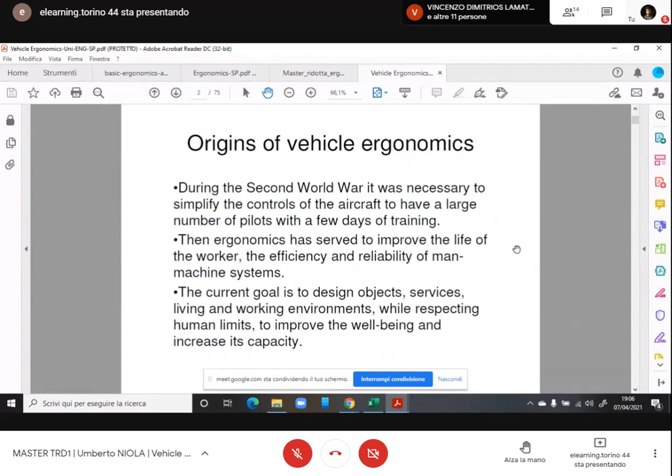There was an increased need for airplanes and expensive, long training for pilots in the world wars, limiting the need for new pilots to be trained, because vehicles are always different, and accidents also occurred due to poor organization of the cockpits. So a great improvement in the study and application of ergonomics was developed for airplanes in the Second World War, and after this also on other vehicles.

We also had our first distinction, in case you didn't hear this first part of the introduction. We have three main families of ergonomics: physical, cognitive, and organizational ergonomics. I'll go briefly into the definitions.

Physical ergonomics is linked to the biometric dimensions and organization of the human body, the internal organs, the manner they work, and the extension and capability of your joints to move. So you can identify the workplace, the organization of controls, access, seating, and all the arguments linked to the dimensions and main features of the human body.

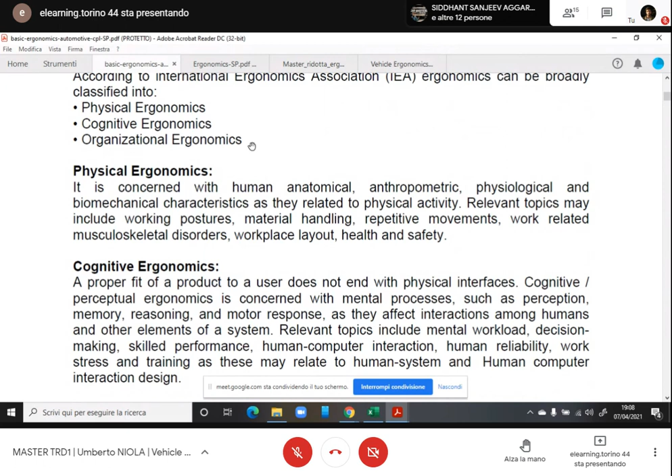Cognitive ergonomics is the manner in which the mind uses the environment. The interface between human and machine is important physically, but you also need communication between them, so you can understand the external world, make decisions, and apply decisions to the external world. You must use your senses - eyes, hearing, touch, smell - if something is cold or warm, for recognition of signals, other people moving, and everything needed for guidance in traffic. This is an application of cognitive ergonomics.

Finally, organizational ergonomics is the manner in which you can manage more than one person. So imagine studying an urban context, or a workplace for teamwork, cooperative work, realizing optimization for the contemporary use of the environment by several people.

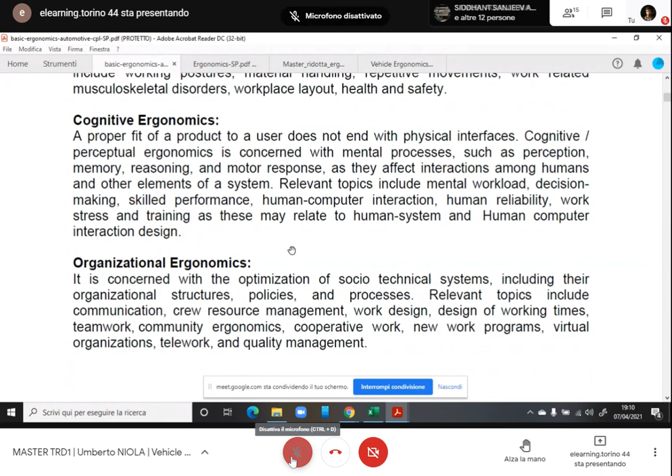Okay, I lost you again. Yes. Okay. No. It's good now. Okay. Yes, I fear I don't see you on camera now. So maybe I lost the communication again. But okay, first of all, we'll tell you if we've lost you. Pardon me, it's not in my power to correct the internet applications.

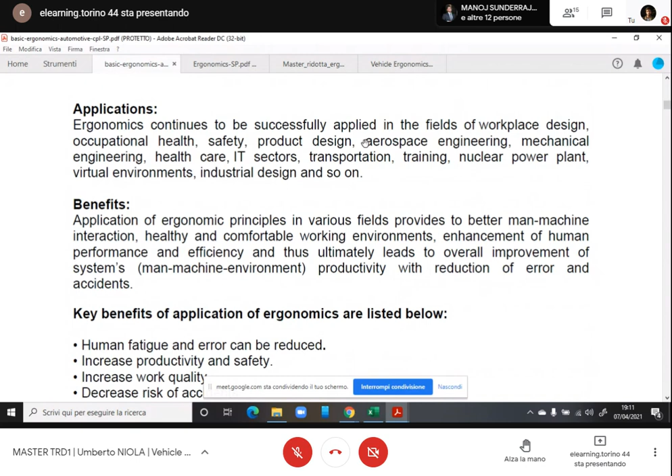So for the applications, you can have a list of them - the benefits in workplace design, occupational health, safety, product design, and other things. But the key benefits are the reduction of human fatigue and error, which can increase productivity and safety.

These terms are not strictly related to economic application - productivity can also mean performance. If you are racing a car, you can go faster with better ergonomics in your car. This is evident with motorcycle riders in racing - they are so linked to their position when riding that the adjustment of the handlebars, the seat, and the shape of the petrol tank is important for driving.

So this is not limited to producing more money - there's also less absenteeism. If you are tired or sick from fatigue at work, you cannot be present at work. Organizational ergonomics applied can reduce lost time, etc.

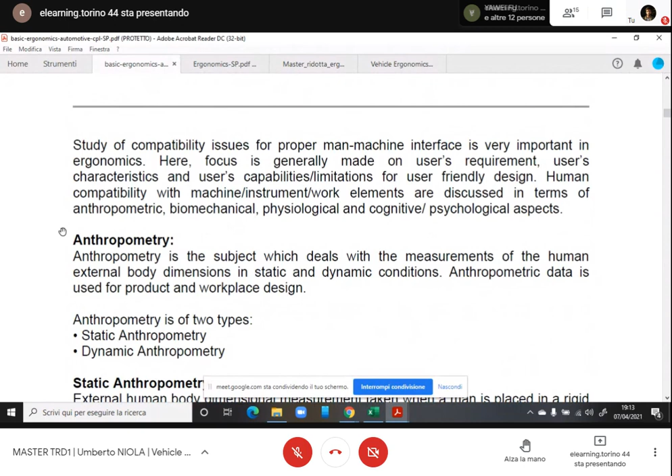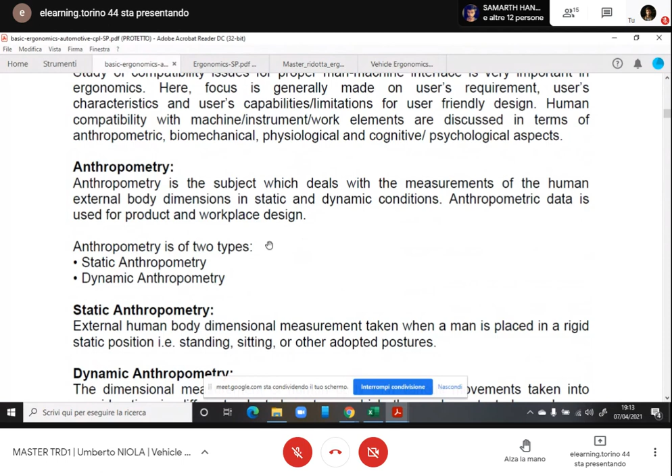Okay, the first part, physical, is linked to anthropometrics. You know what we mean by anthropometry - simply the measure of the human external body dimensions in static and dynamic conditions. Static means the measure of every single part between the joints: the thigh, the leg, the ankle, the feet dimensions, the trunk, head, and all other dimensions in different positions, such as standing, sitting, or other postures.

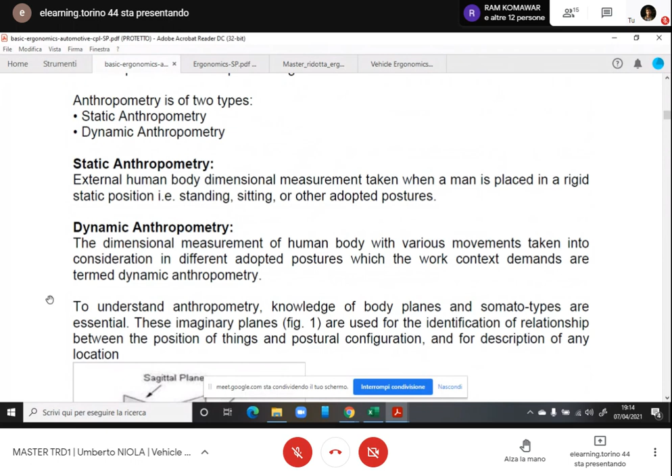Dynamic anthropometry links together the extension and possible positions of the single segments of the human body, so you can reach controls or have access for entering and exiting a vehicle, and also the effort and forces you can apply in different positions, so you can correctly identify and design a lever on the steering wheel, or any kind of object you need to reach and move, like a pedal.

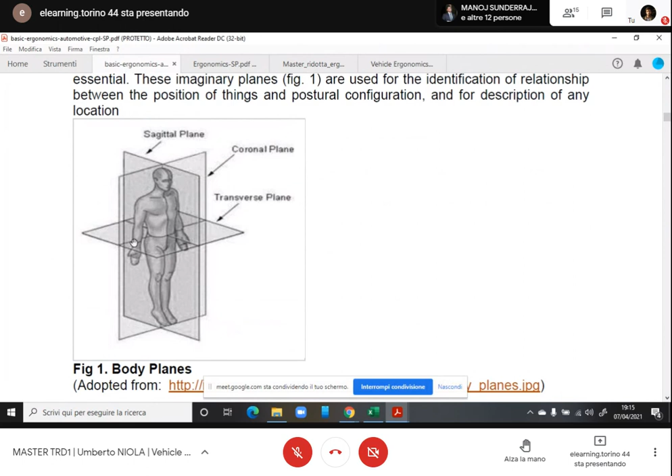So this is the standard reference position for a human body to be considered in the anthropometric study. The sagittal plane divides into half, left and right, symmetrical parts of the human body. Coronal divides the front and rear part of the body. Transverse divides more or less at the belly, the upper and lower part. So this is the reference plane definition.

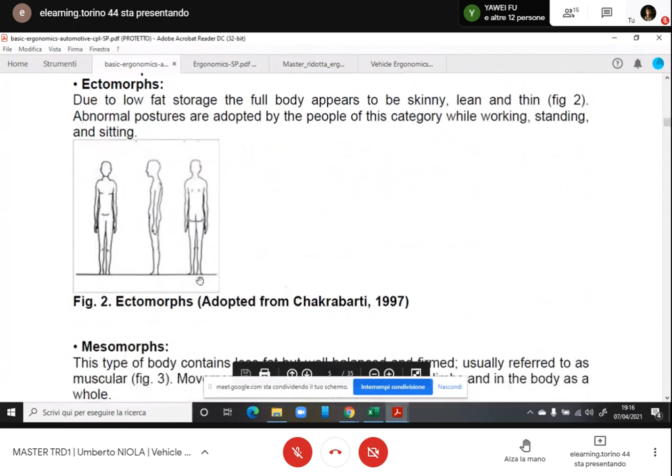We can consider a lot of different approaches to the human body. We can also divide anthropometrics into somatotypes: ectomorphs, mesomorphs, and endomorphs. Simply, we can consider this kind of slim, very slim figure as ectomorphs. The so-named mesomorphs are the normal body, well balanced, firmed, but not fat, or short legs in this manner.

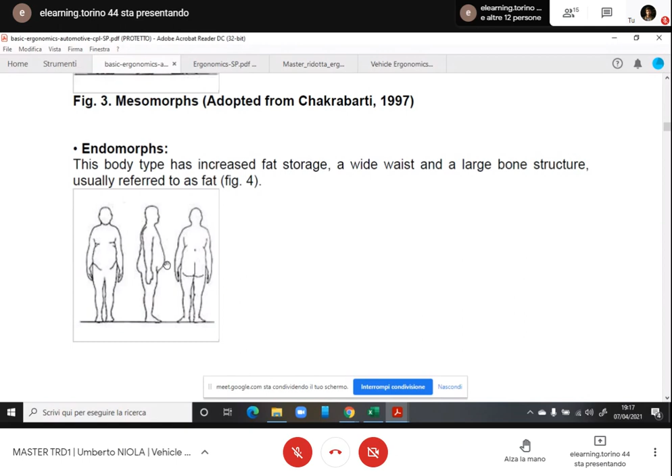The endomorphs are usually associated with fat people. Very different approach - imagine the main composition of a population is in this family, the endomorphs, or the opposite, ectomorphs. This makes a different design for seats, dimension for the seat belts, or distance between the steering wheel and the rider, because the size of the abdomen is very different from one to the other, and also the extension in width.

So we have a lot of different dimensions, and they are also different depending on the geographic area, the age, if you are male or female. So you have different databases for North American people, South American people, Asiatic, European, and African populations, and a lot of different statistics for this.

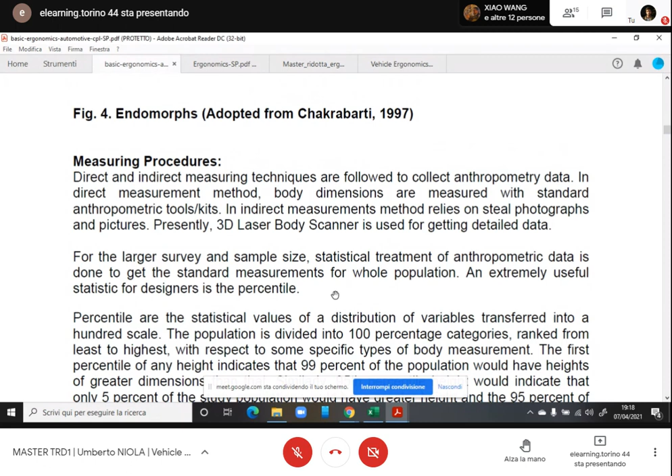When you have enough samples for statistic and anthropometric data, you can also identify the percentile. Do you have an idea of the percentile? Yes, it's the size. I don't remember the number exactly. Anyway, this is a statistical definition, but easy to identify.

Imagine the total number of people you can measure makes 100%. If you take the 100th percentile, this means all the possible dimensions are included in this number. If you take the 95th percentile, which is usually the limit, because very few people are in the extreme condition - very, very small or very, very great, tall or large or other extreme dimensions - you use 95th percentile, meaning all the possible dimensions are included in this list, and all others are greater. So 95 is the top limit for the dimension.

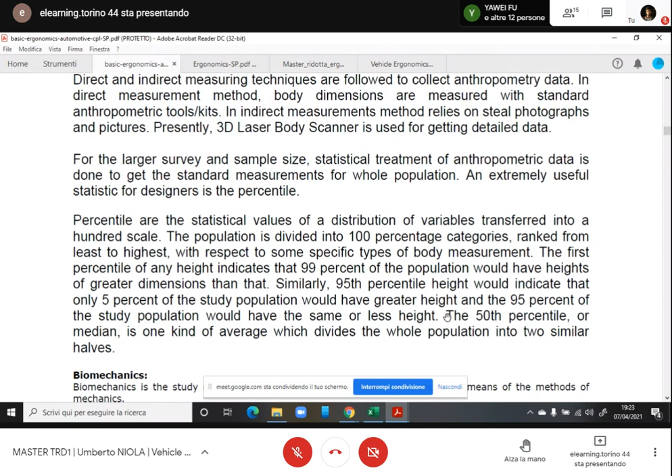Biomechanics includes knowledge of the basic biological features of the human being - the different application of force. This is a sample for applying a load to our arms, and this is different, the capability to lift or make force depending on the position of your arm, but also from your backbone and legs. This is all linked, so you have a lot of samples and different measures made.

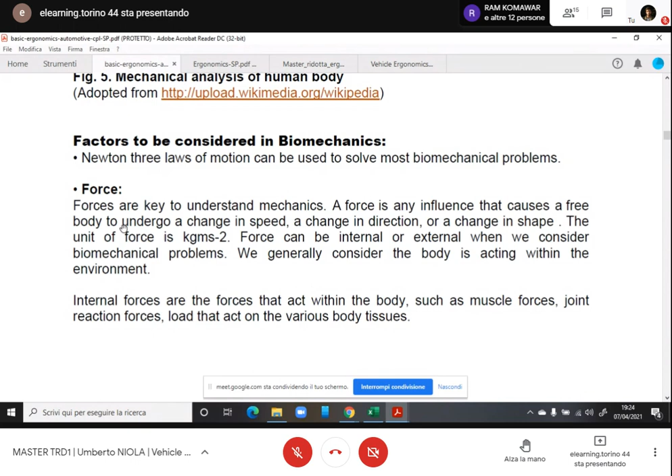So the forces are usually listed in tables, reference tables, to give a reference value if you are designing pedals, levers, wheels like the steering wheel, and something like this. Imagine you must also consider the speed of use of a control, if you have a slow application of force. So force is one main input value or factor considered in biomechanics.

Joints are important because you need to know the comfortable range of motion for each kind of joint, and also the force you can use in a joint depending on its position. So knowledge of the organization is important.

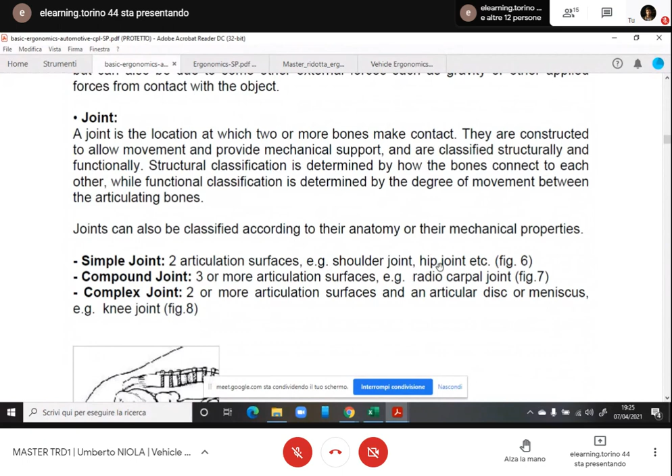You have simple joint, compound joint, and complex joint. Samples here: simple joint is shoulder, hip joint, a kind of ball joint, similar for the shoulder. A complex joint here, compound joint, is the radiocarpal joint, organized by several surfaces and movable parts.

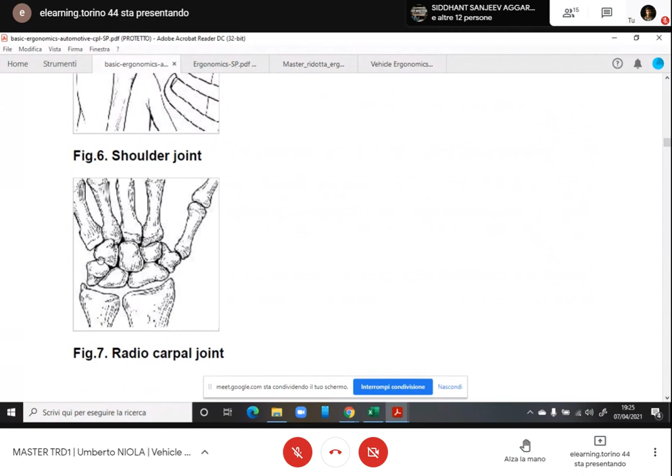Finally, you have the complex joints like knee, with articular disc or meniscus. The more complex is this center part, the radiocarpal joint. The knee joint is complex because you see two main parts make contact, but you also need the support

of the patella here and the tibia here. This is the piatto tibiale, this part, and this is the perone - I don't know the name in English, but anyway, this is tibia, this is perone, this is the femoral part, and this is the rotula or patella in front, limiting the extension. When you go straight, you cannot go in the other direction.

Range of motion are also detected and tabulated, and this is a maximum comfortable position for each of them. So we have an idea of the range of motion.

The other thing is physiology, which is linked to the normal function and good health of the body. Mainly these are samples, but the cardiovascular response is the frequency of cardio and the pressure, and other things linked to blood circulation. In several positions, you have more difficulty for circulation, or more work from your heart.

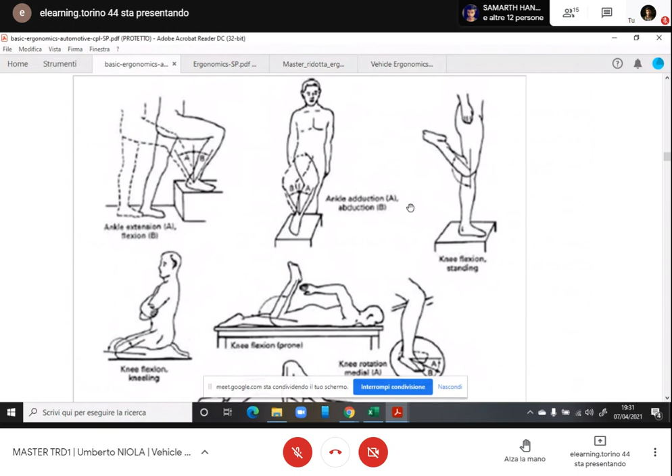So you must investigate all this kind of extension, different positions which allow you to transfer your weight and move, maybe also stepping up, moving in different positions. There are simply a lot of different conditions sampled in this diagram, but this is to give you an idea.

The range of motion of the same articulation can change a lot depending on your position. If you have a loaded or unloaded ankle, or hip, or other things, you can move your leg in rotation in a different manner.

Psychology is concerned with adapting the equipment and environment to the people, because usually people have limited capability to change their physical condition and psychology, pardon me. So you must study the performance of human psychology, the response to external stimulus, and the efficiency for perception and reaction modes. This way you can increase safety, you can reduce stress, because it's easy to recognize the external condition

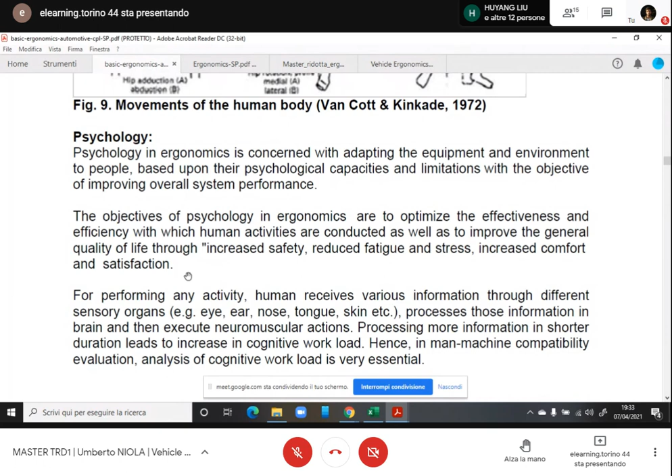For performing any activity, this is a reminder of my first introduction: humans receive various information through different sensory organs. You use always your five sensory organs - eye, ear, nose, tongue, skin - and all this information is interpreted by your brain. You can apply your intention and decision in the proper way, we hope, and then you can send the information to your muscles and move and make all the action.

Are you still alive? Yes, yes, I'm very happy.

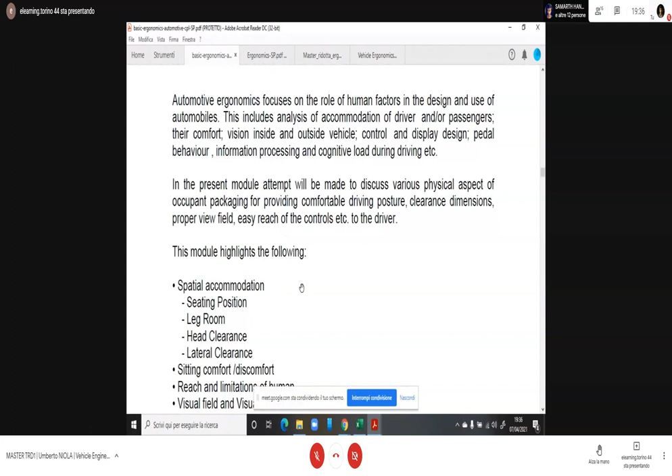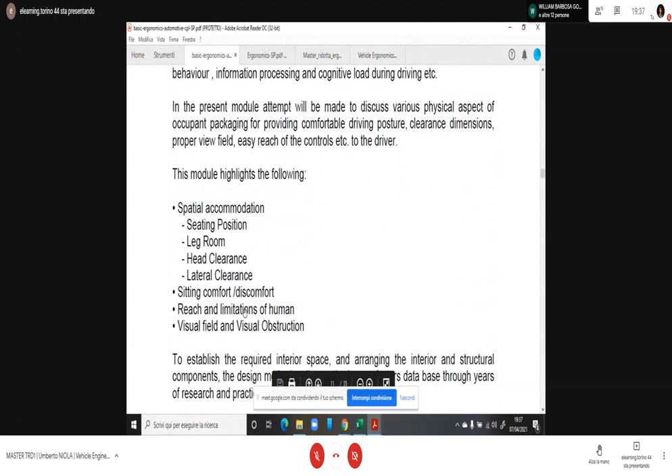The great argument, the highlights are linked to spatial accommodation, which means seating position, leg room, head clearance, and lateral clearance, sitting comfort and discomfort, reach and limitation for the human body, visual field, and visual obstruction.

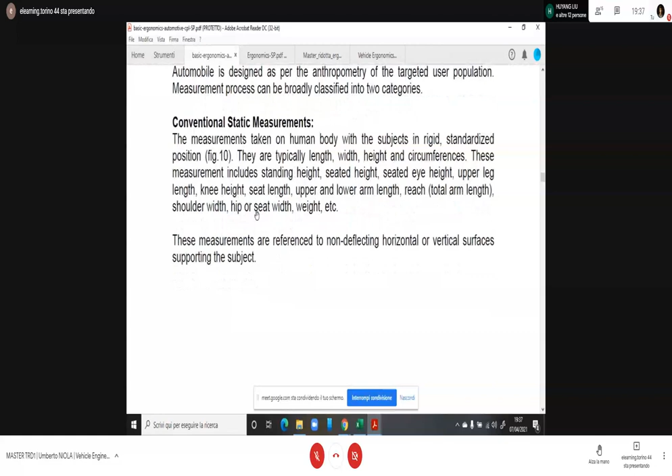This is an introductory discussion. So the conventional static measures are linked in this way. I prefer to show you some pictures, some sketches like this.

If you imagine what happens when you are driving the car, you need to have no interference between your elbows and the surrounding part of the car. Also, the backrest of your seat can produce a problem if you need to move back your elbow.

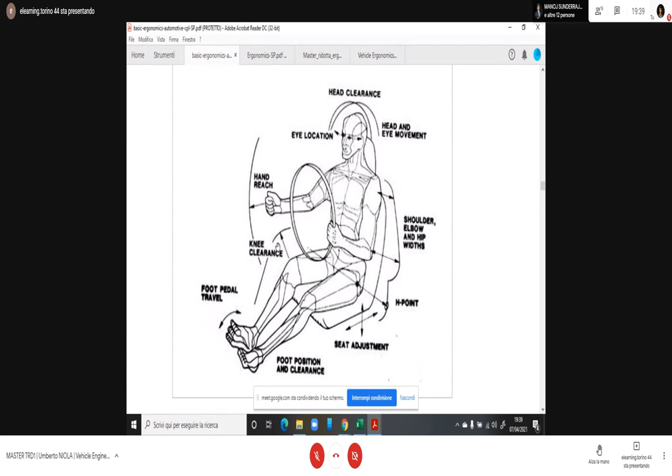The knee clearance under the dashboard, under the crown of the steering wheel, the foot pedal position and travel - you need to have a movement for the ankle and foot included in the comfortable and normal excursion for the joint. So if you need to accommodate different sizes of people, maybe between 5 and 95 percentile, you also need an adjustment for the seat, both in extension - longitudinal extension, because you can have different extension for arms and legs - and also in height, because you always need to see out of the car.

So the eye location must be positioned in a limited area. Without this capability of accommodation, you have limited visibility. The visibility is also investigated by including the eye and head movement, which is another kind of range extension.

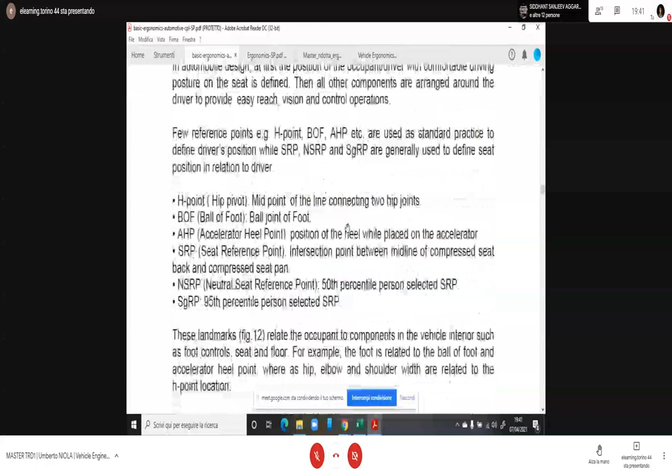You can find also a lot of definitions, conventional definitions used internationally, to define the main points to be included in the study of the driver and passenger position and reference points.

The H point, all of you always use the H point - this is so famous - is the hip point, the hip pivot, more or less the joint between your basin and thigh. It's the midpoint of the line connecting the two hip joints, because we hope you have two legs, so two hip joints.

BOF, ball of foot, is the ball joint of the foot. The ball joint is between the fingers and the remaining part of the foot - it's in the forward part of the foot, but not the fingers.

AHP, accelerator heel point, is the position of the heel while placed on the accelerator. The ball of the feet is the point where you usually apply pressure on the pedal. AHP, accelerator heel point, means the contact point between the floor and your feet.

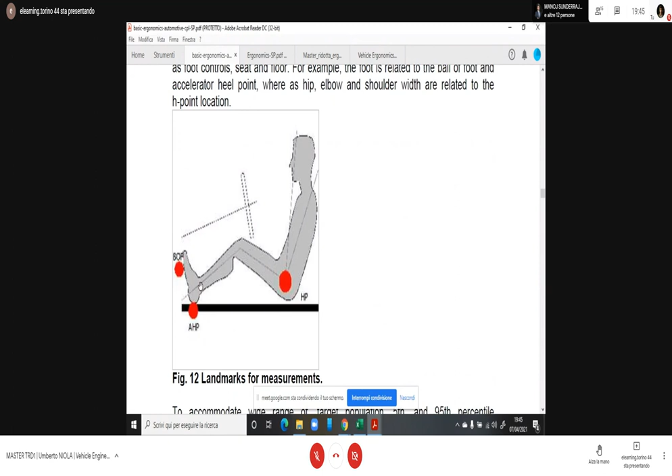So never answer my question on the starting point for accommodation in the driver position by saying the H point. Never start from the H point, but from the AH point, the accelerator heel point, not the hip point. You understand? This is a common mistake, to confuse this with the starting point. This is defined by this position.

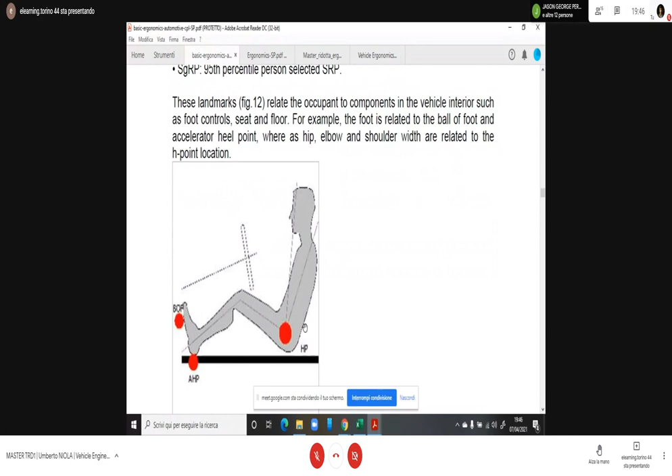So, completing the important names, you have the SRP or the R point, the H point and R point, which is the real position when you load the seat with a weight. It depends on the elasticity and compressibility of the foam of the cushion of the seat. You can only identify it when you have a real seat, loaded with a mannequin or a ballast, and you can measure where the H point really is.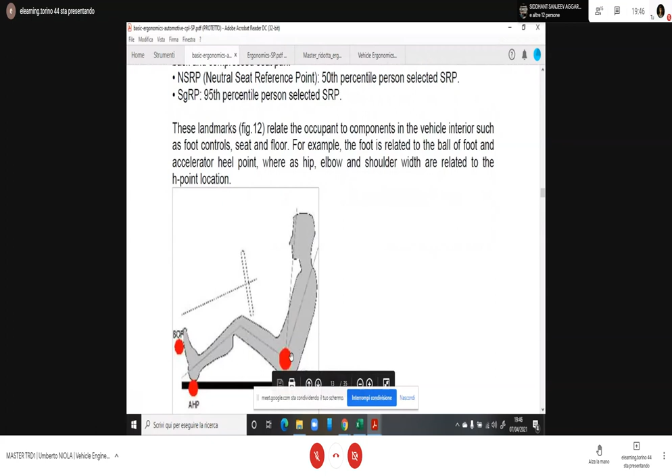Neutral is when you have the 50th percentile person selected, so the mid position. The higher position, the more backward position for the seat, is associated with the taller, greater-sized people, 95th percentile person. We can have other letters and symbols identifying different positions, but these are the main ones. So these are for a wide range of target populations; we use 5th and 95th percentile anthropometric data.

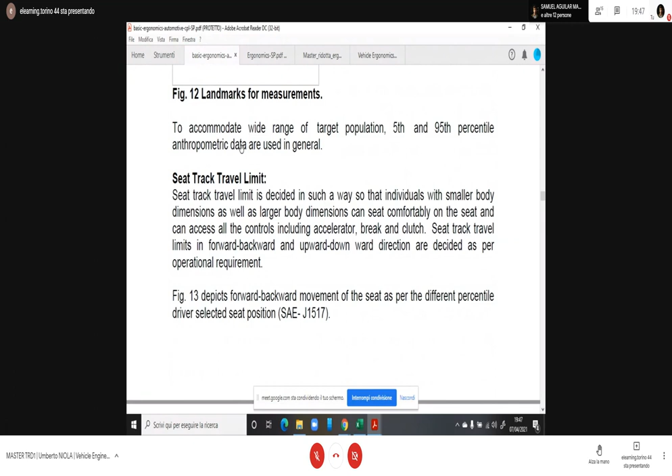If you want the widest range possible, you use 5th percentile female population and 95th percentile male population. This is the most correct way to use the dimensions table.

You have seat track travel limits, but this depends on the accommodation data you select. They are also linked to the need to use the pedals and the steering wheel. So you must, if possible, move forward and backward and up and down in a manner that accommodates both needs.

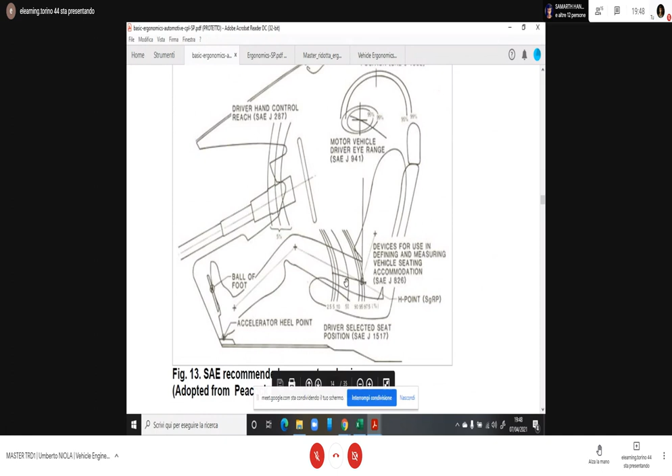So this is the representation of all the possible positions for a sample. Starting from the same accelerator point, you have this kind of inclined line representing the H point moving through the different accommodations, from end to end of the seat adjustment track, and also the percentile. If you can see, this is shadowed.

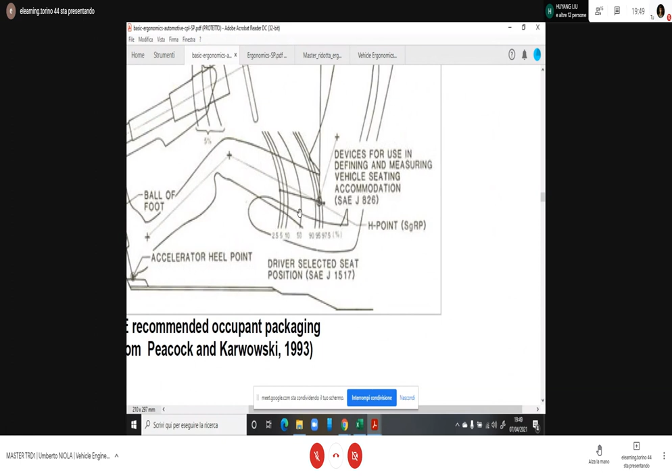You can see this kind of diagram. These curves are also linked to the percentile: 90, 95, 97 and a half. And this is the middle position.

Any question? No. You are completely comfortable with this? Yes. Perfect.

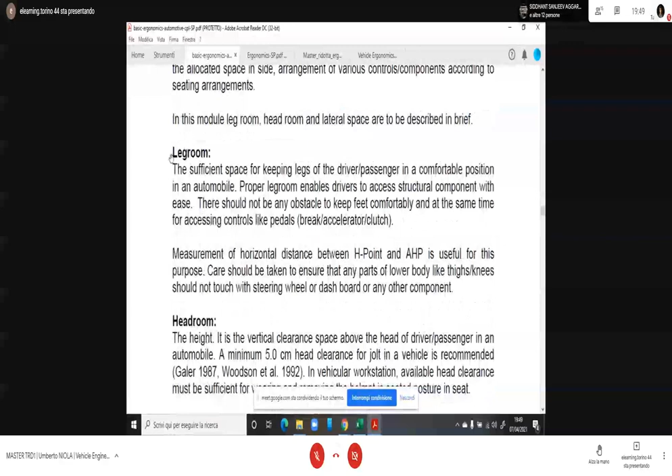So, other things: we can reach the controls. We need to control the leg room, the headroom, and the lateral space. In another presentation, we can go in detail with a sample of tables.

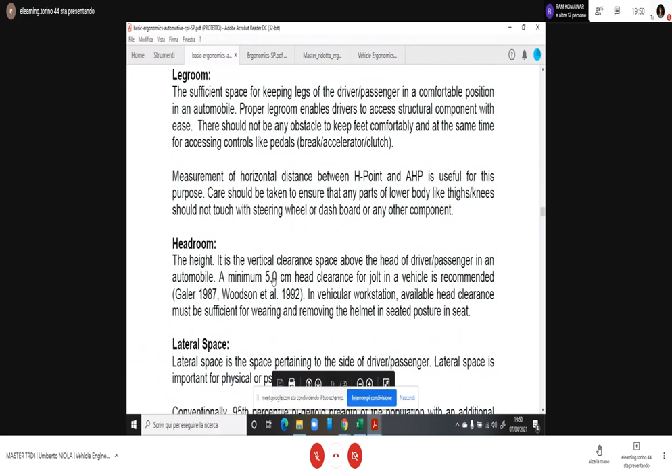My intention in this overview is to give you some samples, maybe for headroom. We need to have a minimum of 5 centimeters of head clearance in a vehicle. These are recommendations from experience. If you start making a draft design, a good starting point is to have this dimension, this clearance.

Okay, for lateral space, usually if you add 10% of the 95th percentile dimension of the shoulder width, it's considered a good dimension for lateral clearance during normal sitting, side by side.

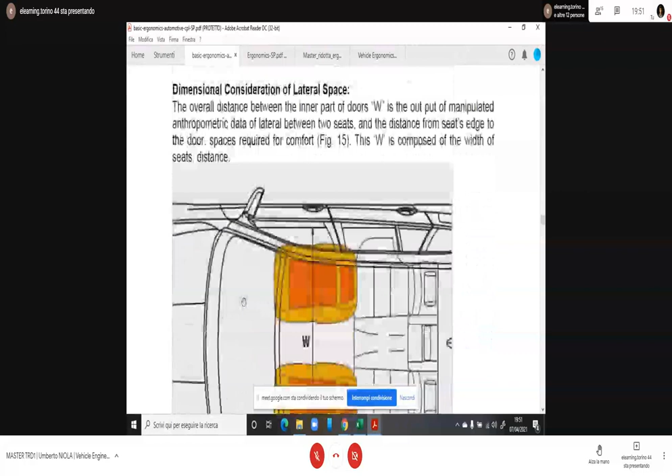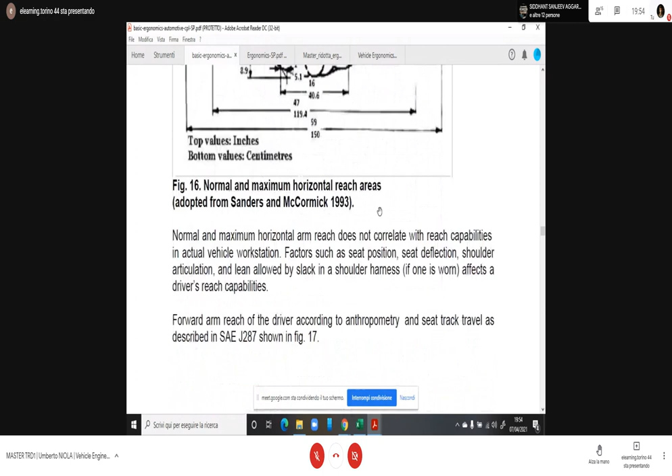So for exceptional movement, you can also imagine using the external area. For normal use, it's preferable to limit to the envelope of the lines, the continuous line. Okay, this is simply for having an idea.

This is the head contour, including also hair and the possibility to tilt your head forward and back on the neck. And so this is the need to identify an eye ellipse. The center of your eyes can move front and rear and also side by side.

So you have an area for the center of your eyes, not simply a point. And this volume includes all the possible positions for small people. They are usually in the front of the area because they have the seat in the forward position, and the back is for the taller people.

We also have the need to adjust the steering column and steering wheel position if we want to completely accommodate the different sizes of people.

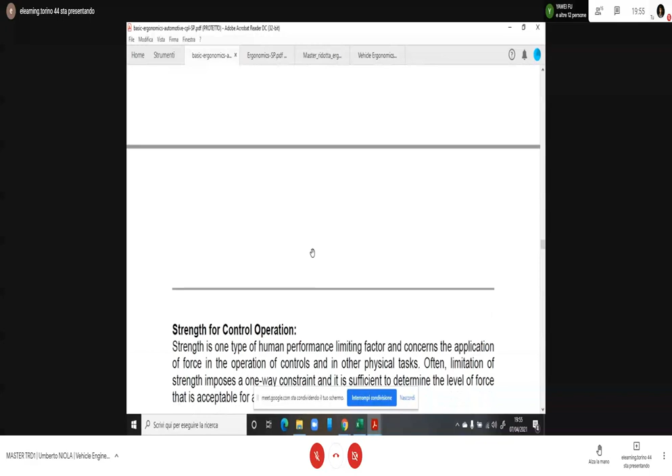For having an idea of the different forces allowed for comfortable use of pedals: brake pedal, we start from the weak people, so 5th percentile of the right leg strength. In this case we consider a male, but we also wish to sell cars safely to female people. Anyway, this is for making the first consideration. These are tabled in our anthropometric tables, statistical tables. So 261 Newtons, which means more or less 26 kilograms of maximum force.

This is for a limited time, so you can use this value also for referring to the kind of force you can allow on the pedal. So all the braking system, assistance, and the dimension for the pedal must be designed according to realize this level. Okay, a clutch pedal.

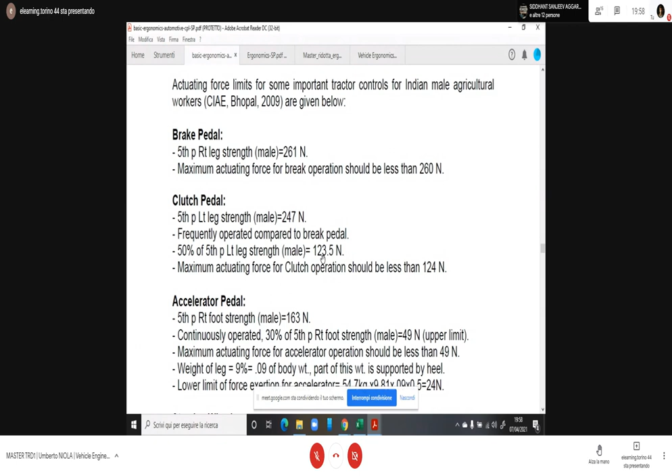So on the left leg the maximum effort allowed, the maximum force is less than the right, usually more or less 24 kilograms and a half. But we must reduce this in reason of reducing the stress for this leg, so we consider only half of the maximum force, and limit this kind of load to only 123 Newtons.

This is the kind of consideration you can use. For an accelerator pedal, which is a static effort, you have all the time your accelerator pedal pressed. So starting from this effort for a long time, not for a single dab but for continuous pressure, you must limit to 163 Newtons.

But for the reason of allowing also aging people, not introducing pain and other issues, we must limit to one third, 30%. And so the maximum limit we use is this number, which is more or less 5 kilograms of pressure. This is the maximum allowed standard pressure on an accelerator pedal.

But we also need to support the leg, because you also have the weight of your leg pressing automatically on the pedal. So you need a counter reaction for the control. If you don't have this, you simply always have a completely pressed pedal to the floor, maximum accelerator actuated, even if you have no force or weight on it.

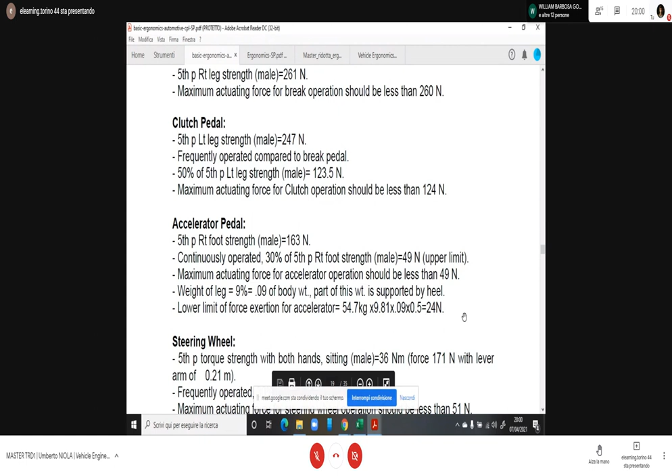I don't know if you are familiar with this kind of consideration, but they are all included in the studies for the controls. They are simply listed here because for every kind of control, knobs, gear shifting, and other things, we can find similar discussion.

So this is the steering wheel. In the past we had no power assistance for steering, so if you had a heavy truck, you needed a very strong driver for steering. But in today's products we have power systems, so the limit we can set is in this range: the weaker driver is limited to 36 Newton meters with both hands, and this force relates to this kind of diameter with a lever arm of 0.21 meters, imagining a standard diameter for a steering wheel.

Frequently operated, we can also reduce this limit to 51. Maximum actuating force for a steering wheel should be less than 51 Newtons, so 5 kilograms of maximum effort. For gear selection, same kind of argument: limit to 5 kilograms maximum effort for changing gear.

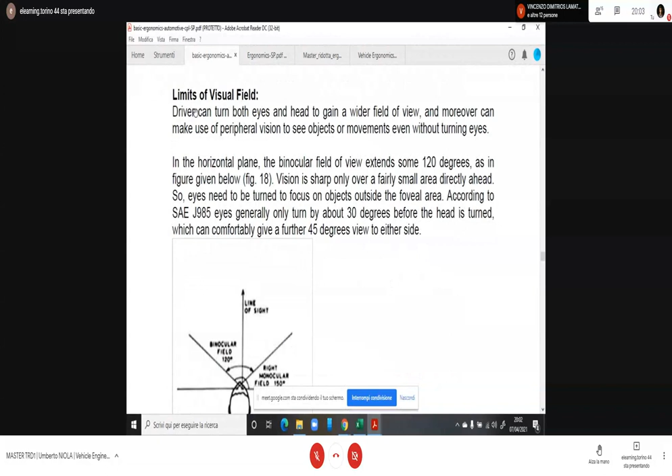Visual field, we have a limit for it. You can imagine you have two eyes, both with lateral movement. If you are pointing straight in front of you, you have overlap between the two fields, which is only limited by your nose in between. So your left eye cannot watch completely to the right, and the right eye cannot watch completely to the left. You have this empty part, no binocular field, so you must turn your head.

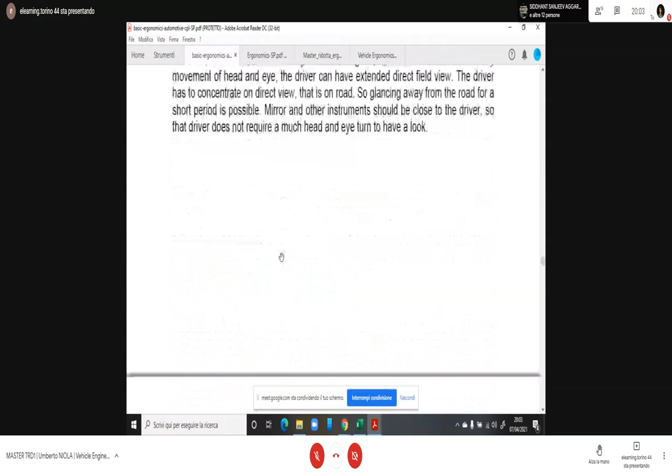The same applies in the vertical plane. Without moving your head, you can turn your eyes up and down, in terms of 45 degrees upward and 65 degrees downward. You can see the lower part with your eyes. Yes.

Comfortable viewing is only 50 degrees up and down from the center line. You must add 30 degrees of head tilt. This is the easy tilt up and down, so you can add this extension to the eyes to get the idea of the extension from the center line.

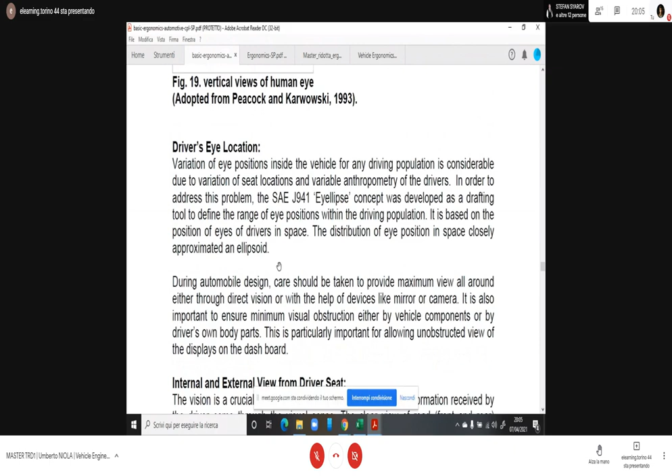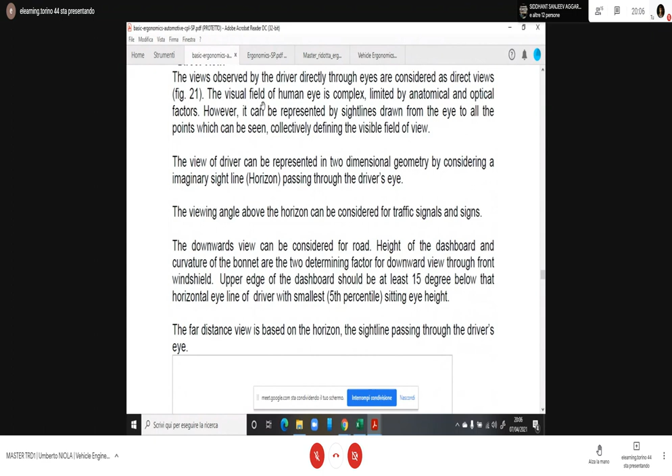These angles are needed because we have different capability to identify details and define speed, direction, and dimension for an object. So the direct view is mainly accurate. We're speaking in terms of physiological features of the eyes in a very restricted conical field, more or less 5 degrees opening of this cone, and pointing in one direction with your eyes gives a very limited area of perfectly defined and identified distance, dimension, and the speed at which you are approaching or the object is moving, side by side or towards you.

All the other fields are decreasing in definition. So in the lateral or side view, you can only identify that something is happening, but you cannot identify the shape perfectly. You can identify more or less color, but you have no idea of dimension or speed. You simply have attention that something is in your visual field, but if you want to detect and identify it, you must turn your head and point at it.

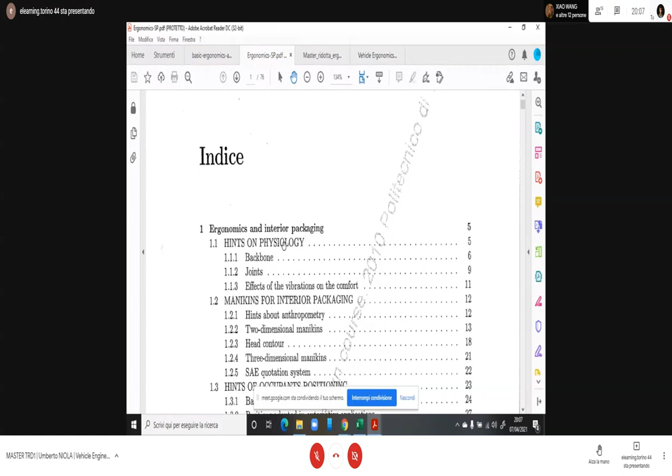All the other things are more or less redundant for this. I prefer to give you an idea of perception and reaction, so cognitive ergonomics, since I've already covered the physiological one. To be complete, I will also share with you this presentation, which is standard for engineering studies, and so you will have the packaging starting from anthropometrics.

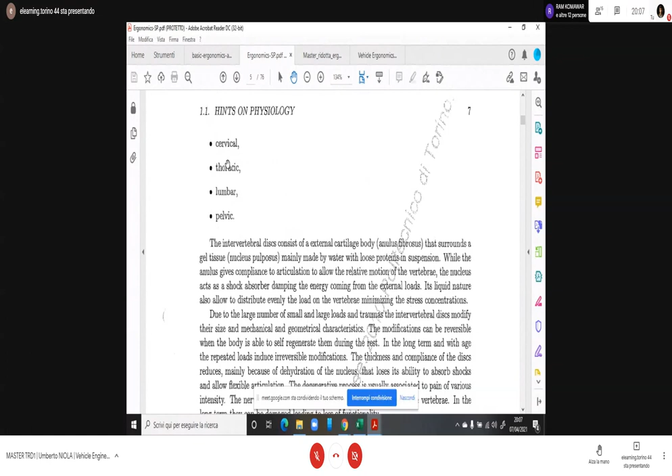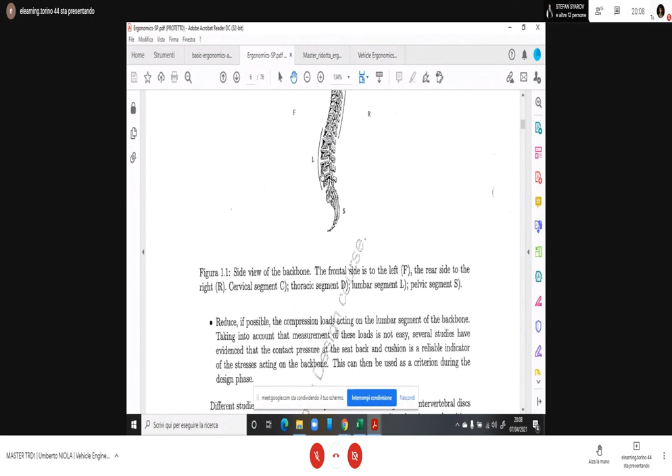You will have a definition for hints of physiology, so you will have great attention on the main part of our body, which is the backbone, extensively illustrated in terms of shape, organization, and also the possibility for stress, because you need to identify what it means for the bones and intervertebral discs and their organization. So you have problems for the angles included by each single vertebra, because you can risk pinching the intervertebral discs, which allow the movement of the backbone.

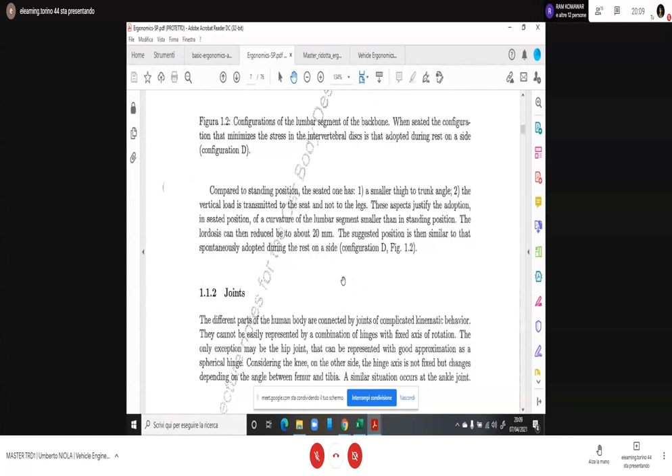So you have limits in torsion and mainly in bending of the single segments, and they are responsible for transmitting the weight load of the body to the lower part, allowing comfort or not, and also the correct function for the legs and other nervous transmission in these parts. You can have pain and other serious problems from sitting for a long time in one position, like a driver, because you stay in the same position for a long time. You will find in this presentation the typical angles allowed for every single joint.

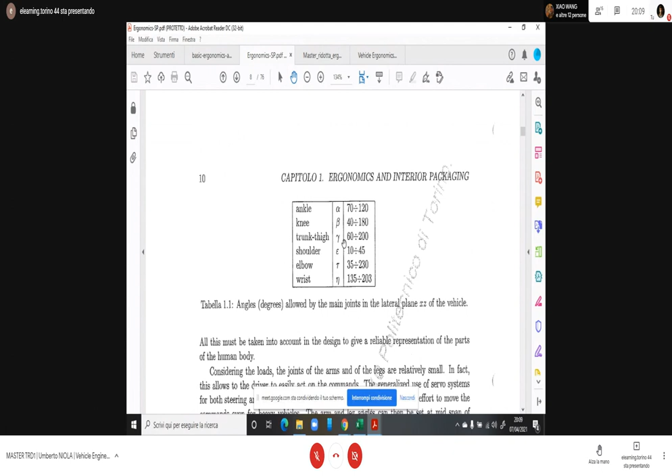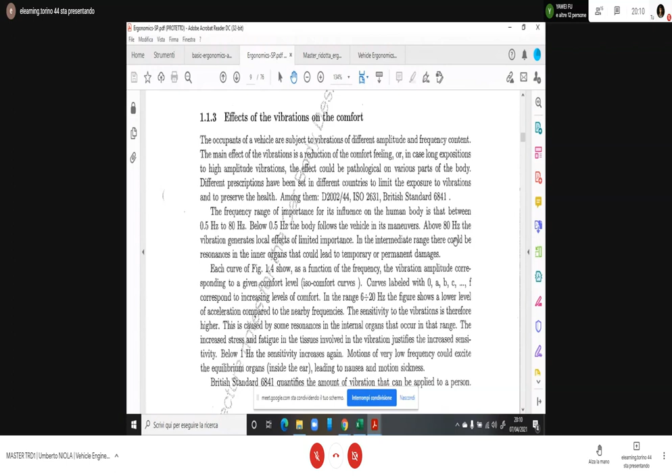You must also include in the physiological effect the vibrations, because we are now listing a lot of arguments in static and dynamic conditions. One great argument in dynamic comfort and fatigue is linked to vibration, which is studied and also addressed through noise, vibration and harshness. This is a great argument in developing a car. So you have low frequency, high frequency, high intensity and low intensity vibration. All of them include some different things.

Imagine a low frequency movement can introduce disease. You have some problems, like if you are going on the sea on a boat on waves, you can get sick from them, or from rolling, braking, or accelerating, which introduces some problems for passengers, maybe usually.

Fast movements are bumps and other things. So suspensions are meant to introduce, and also seats are meant to introduce, some filter limiting the exposure to the main forces in a vertical manner.

And finally, the high frequency vibration, which is produced by the tires and wheels rolling on the road, and the engine and transmission. These kinds of problems are disturbing because they are more or less in the same range as the internal organs' capability to vibrate in resonance with these kinds of frequencies. So they can also create problems for the internal organs.

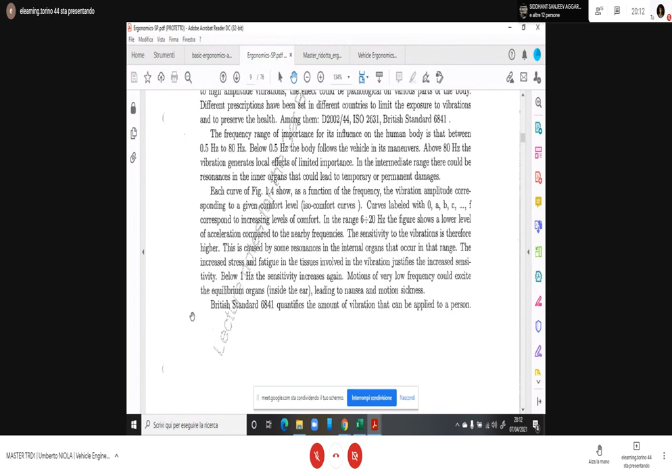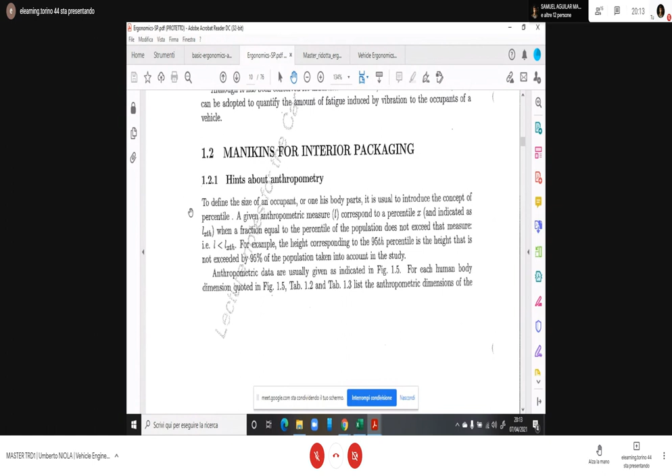I'm confusing you a lot, I think. This is only for giving you information. All these kinds of things exist and must also be considered when you are designing a car. You will obviously have specialists for every aspect, but if you have an idea of how they are included in packaging and defining a car, this allows you to start with a more perfect design.

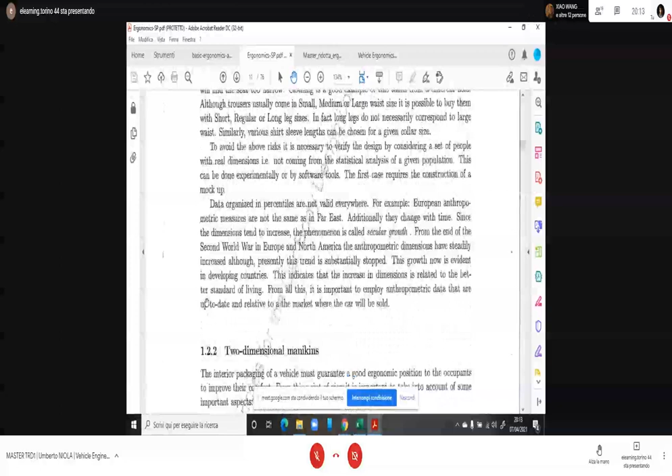The manikins for interior packaging represent different things. You will find in this presentation also the discussion about the difference between different populations, so I prefer to show you similar examples.

If you design a seat accommodation, a driver accommodation, for the 95th percentile, this means all the people who are less than 185 centimeters tall can sit and have clearance. Maybe they don't reach the controls, the steering wheel, and pedals, if you cannot adjust the seat, but all the people in this dimension can sit and use the car.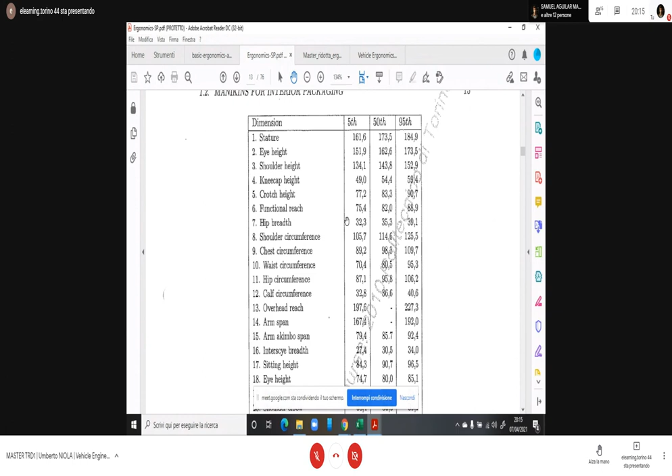And this is the fifth percentile, which is the minimum dimension included in our adjustments. And so you will have also shoulder height, knee cap, crotch, and shoulder functional reach, which is the extension of the arm, and all the other dimensions. Foot length, foot breadth, and palm - really, you have all the possible parts of the body measured and listed, also the weight.

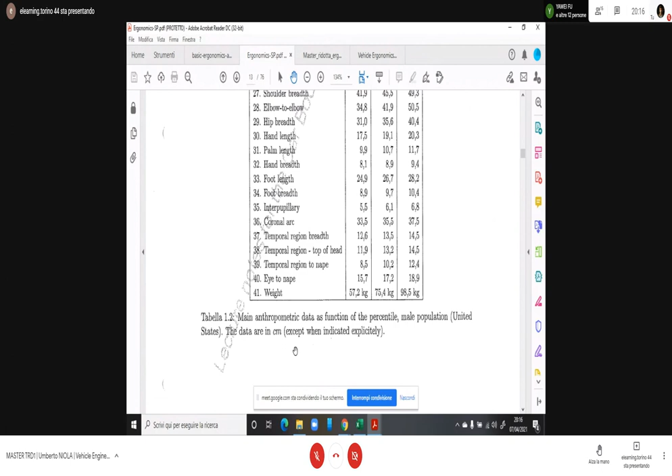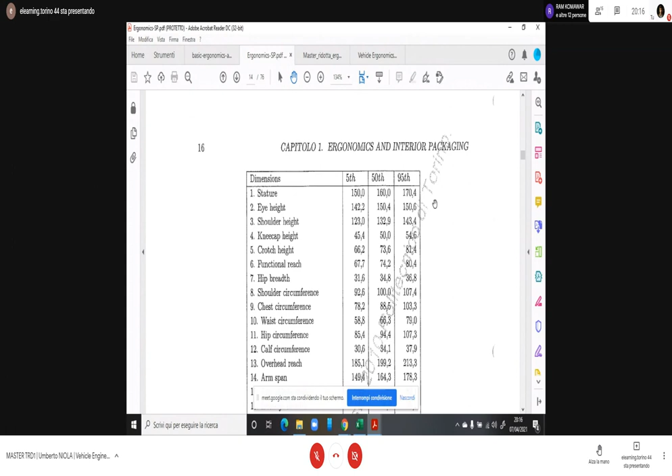But the main thing is a dedicated particular table. The statistics of this table are referred only to the male population of the United States, North America. The dimensions change in this other table, which is dedicated to the female population in the United States. So you can identify the 95th percentile is only 170 centimeters maximum stature. Depending on the table you are considering, you can refer to different dimensions.

Another great, but basic, piece of knowledge is this two-dimensional mannequin. This is for basic drawing. You only consider this kind of sketch. They are all conventional engineering instruments for design. The particularity is you have no head, you don't consider arms. This is simply to identify the hip position starting from the pedal, the accelerator pedal position. The strange thing is you can change the leg length, the thigh length, but the trunk dimension is fixed.

It's the maximum percentile allowable. The foot dimension is the maximum foot possible. So you can have short people, but with enormous feet and a long trunk, because they are not changing in this mannequin. This is only for starting.

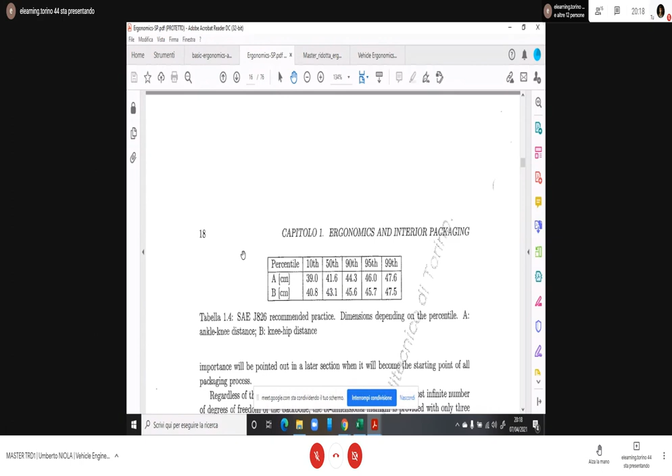Now everyone uses software packaging, so this is not used so much anymore. But if you are drawing by hand with normal paper and pencil, you can use this kind of conventional drawing. You have all the prescriptions and instructions for design, all the necessary drawings for packaging.

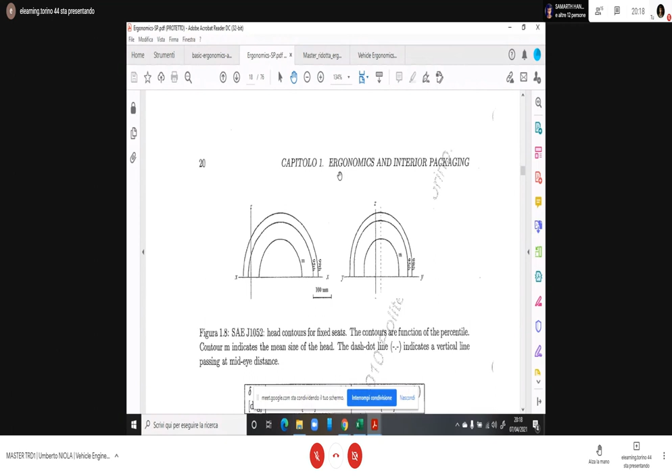Okay, so only for having our final idea.

We will spend some more words better illustrating the other things linked to access, exit, and the mechanical constraints linked to identifying the starting position for packaging, and then adding the seat inclination, the pressure distribution on the seats, and the following rows. If you have not only the front driver and passenger but also a back row, and maybe a third row following, they will all be included in the previous presentation.

The components for cognitive ergonomics are linked to the performance of the driver, and so you can define the environment, so the infrastructure.

If you are imagining designing a highway, a street, you must also identify by this kind of ergonomics the lane width. You must identify as a driver the location of the traffic control devices, so signals, lights, and other things. You must identify the speed limits and other things.

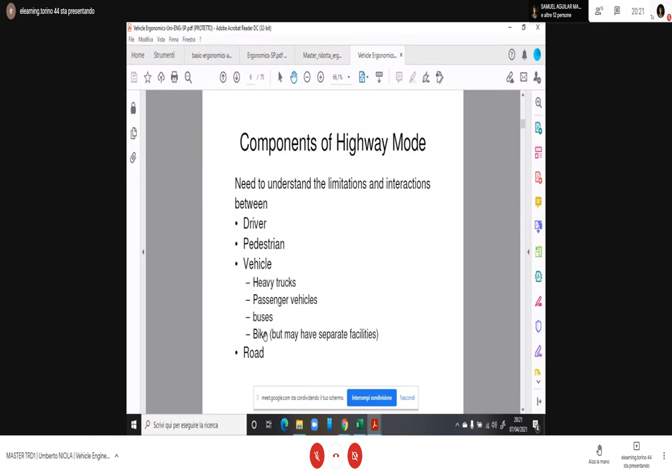Are there other people and components on the highway? You must understand the other pedestrians, other vehicles, and identify the kind of vehicles, so heavy trucks, passenger buses, bikes, other things. You must also identify the changes between ages.

Okay, I beg your pardon for the time wasted in the previous part of the lesson by the connection problem, but anyway, there is another thing strictly related to the organization of the car and the road: the time variable.

The human and machine environment is very interesting and important also for you, and is linked to the decision process and the realization of adapting the driving of the car to this perception and reaction time.

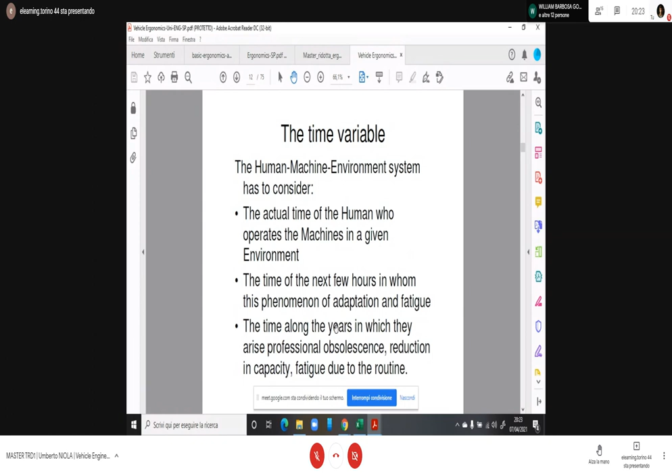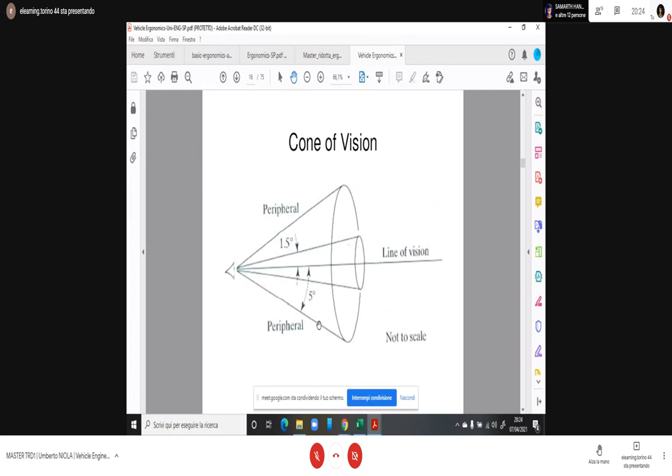Performance in traffic. I'll go fast to the visual reception, simply for showing you what we mean about the cone of vision. So you can see this very, very narrow angle for the center line of vision is simply 3 degrees of complete opening. You can go to 5 degrees, so 10 total opening, for peripheral view.

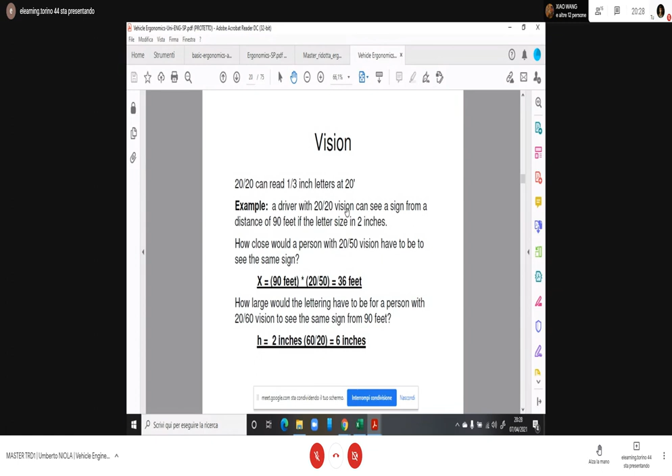The dimension of lettering is important depending on the visual ability of people - not everyone has full vision, so you must consider some short-sighted people too. But this is more linked to the speed allowed on the road. Imagine you're in urban traffic, allowed to go simply 50 kilometers per hour. If you need 1 or 2 seconds to identify a signal and read and understand the message, that corresponds to a certain distance at 50 kilometers per hour. So the dimension of lettering is one thing. The same message on a highway for 130 kilometers per hour, you still need the same 2 seconds to identify the signal and understand the message, so you need a much greater distance between you and the panel, and so increased size for lettering. This is the intention behind introducing this to you.

So you also have some interesting details about glare vision, which means the capability to have clear vision under different lights, or passing from dark to brightness and reverse. This is interesting to consider.

Research has shown the time to recover from dark to light condition is between 3 to 6 seconds - 3 seconds going from dark to light, and 6 going from light to dark condition. Times differ for young or skilled people, but imagine this is the normal condition if you're on a sunny day with bright light. If you enter a tunnel on the highway, you go from light to dark condition. If your headlamps are not working in front of you, you need 6 seconds to adapt your vision and identify the details.

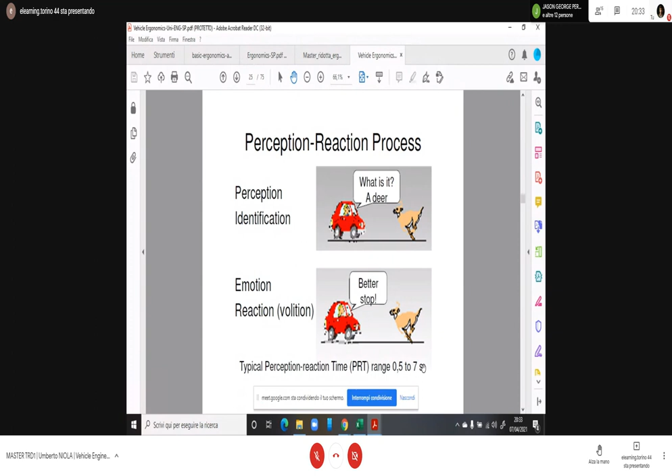Until this moment, I had not applied any pressure or action on the brake. I need a time, statistically included between half a second to 7 seconds for aged people in a panic reaction. At the end of this period, you start pressing the pedal - the foot begins to hit the brake, but there's no actual deceleration yet. So the deceleration and stop distance start only after this half a second to 7 seconds of full-speed travel.

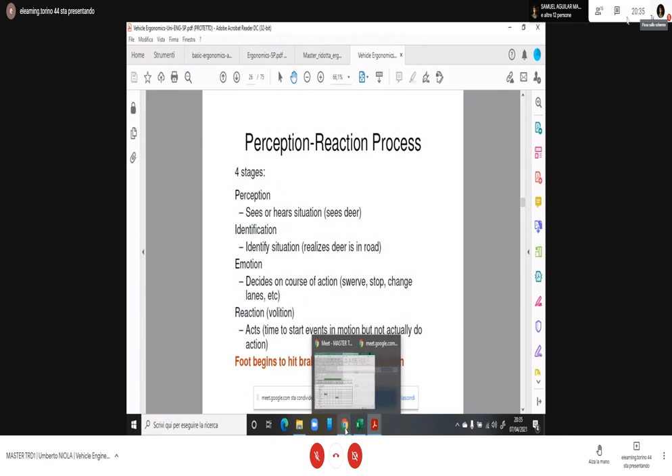Are you still alive? Yes. Okay, pardon me for the extension of time and the loss of time at the start of our discussion tonight. We have...